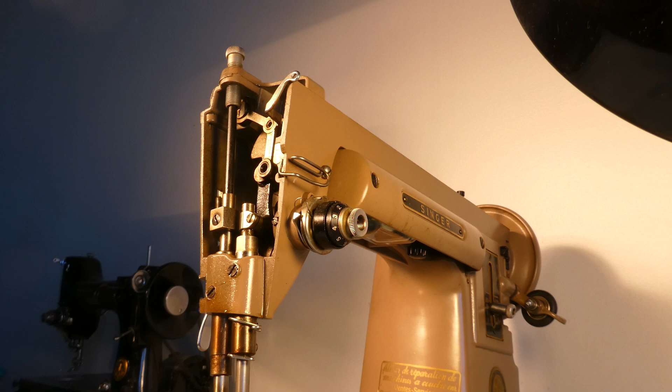Oiling the Singer 301A, Part 3. In this video, I will be oiling the faceplate area as well as the bed of the machine, and then also do the bobbin winder.

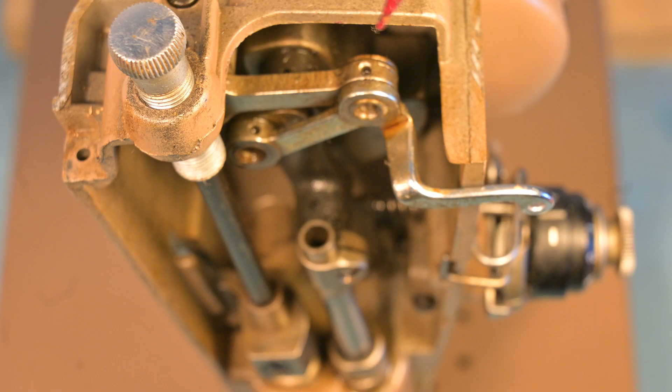Here is the first oiling point I start with. Back here, a little bit in the shade, is the second one. The third one is up front but a little lower. And the fourth one is a little less clear in this shot, but it is right down there. So that's the first four.

The next four are number 1, number 2, number 3, and number 4. Those are the next four oil points. So altogether, that is a total of 8 oil points in the front area.

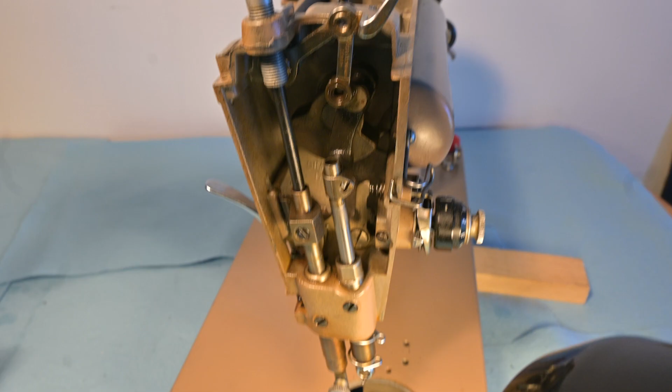This is a nice close-up showing the first 4 oil points on the faceplate, and that lines up by using the hand wheel. 1, 2, 3, 4. We're going to move to the bed next.

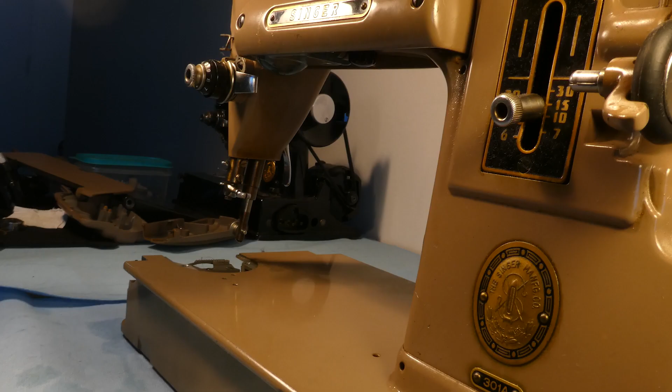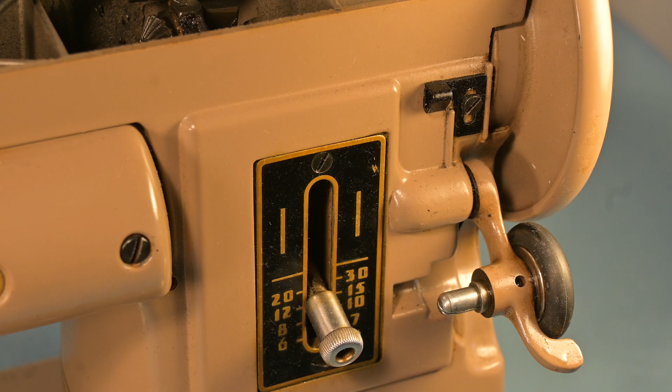This is not going to be a difficult job. The one place on the bed that we want to lubricate with oil is right there. There we go, second one is there. Third one is there. Now we're going to move up. Fourth one is here. And then the bobbin winder.

But for now I will put it back in place, because I don't want to lose track of it. I don't want anything else to remain unprotected.

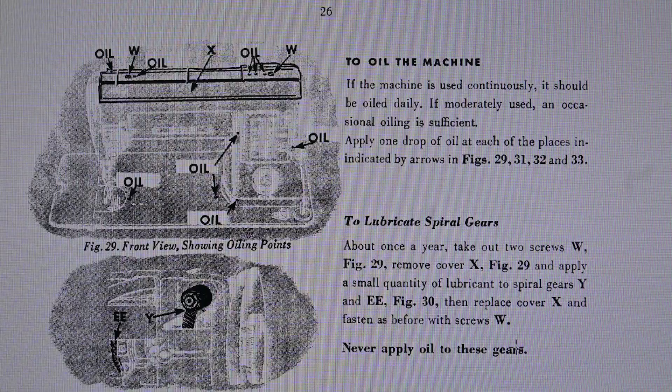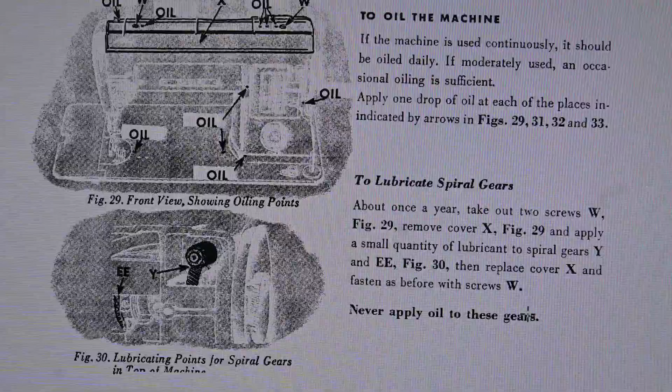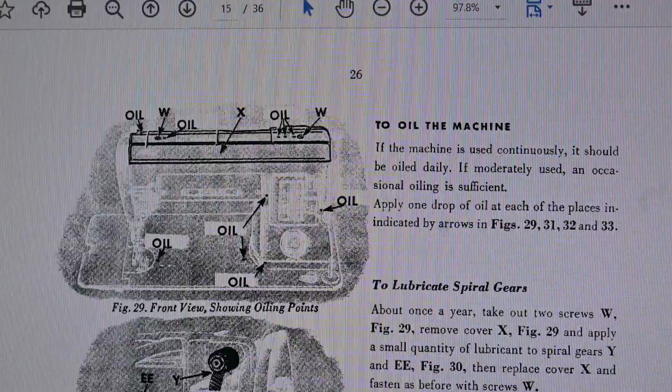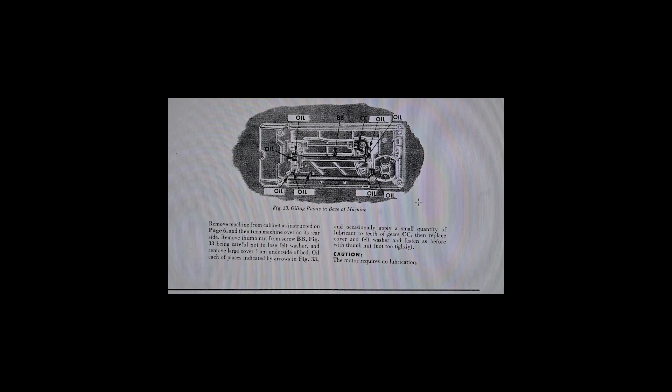So if you want to get a shot of that picture, I'll give you another one here in a second. Here it is, there's the underside of the 301, the oil points. If you want to get a photo or a shot of that, here's your opportunity right now. But that's what we'll be working on.

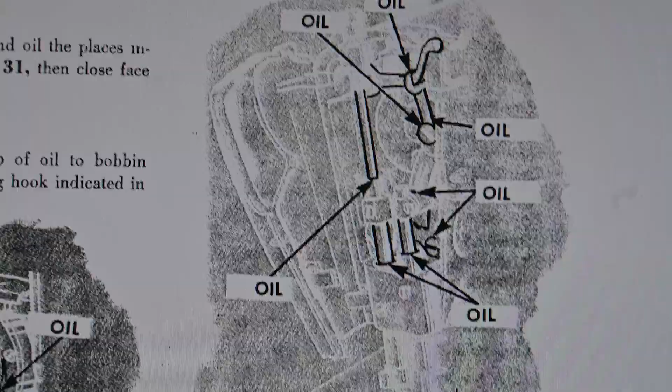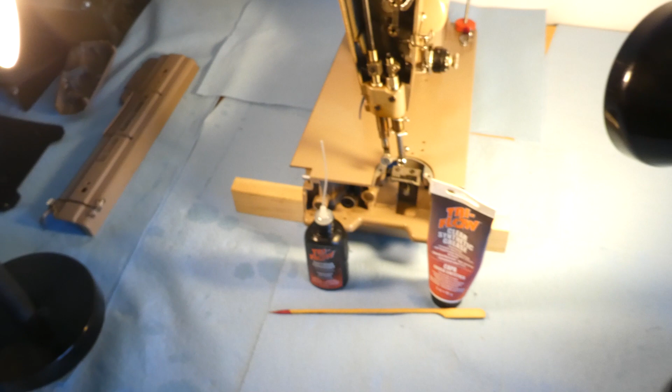And then I do oiling locations on top of the machine and on the bed. And it also shows, here's the setup for today. Here's the Z30 with the Rode mic on it, on the Manfrotto stand. There's my work lamp spotlight, there's my one cheapo lamp, my other cheapo lamp, and there's today's victim, the Singer 301A, and more oiling and a little bit of greasing to finish up the oiling 301A series of videos.